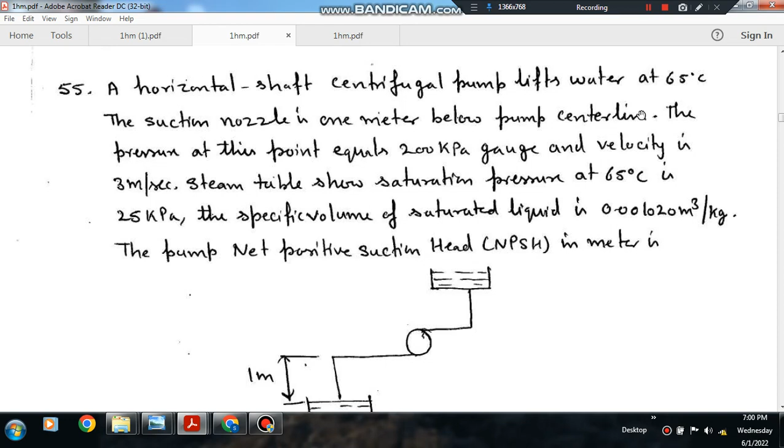Question number 55: a horizontal shaft centrifugal pump lifts water at 65 degrees Celsius. The suction nozzle is 1 meter below. The pressure at this point equals 200 kPa gauge and velocity is 3 meter per second. The steam table shows saturation pressure at 65 degrees is 25 kPa. The specific volume of saturated liquid is 0.001020 meter cube per kilogram. The pump's net positive suction head, NPSH, in meters: option A 24, option B 26, option C 28, option D 30.

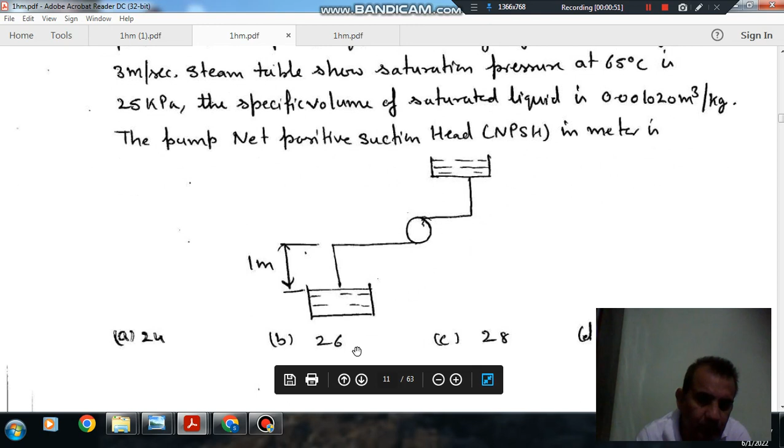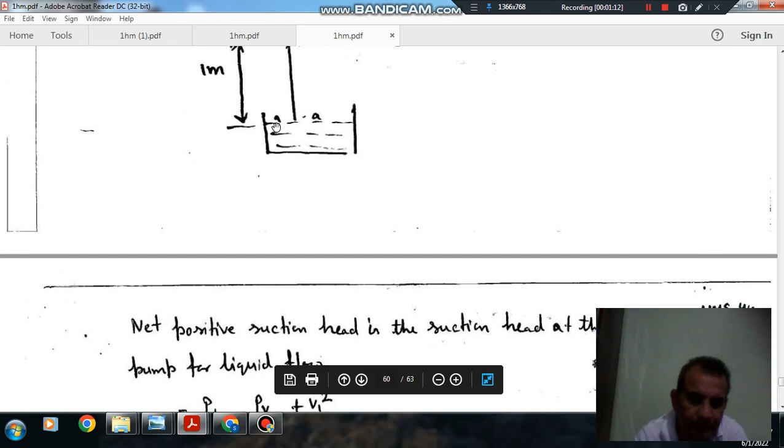So this is your schematic figure. This is 1 meter, and this is your pump, with point 1 just at the entry of the pump, and A is your atmospheric pressure or water level. So P1 is the pressure at A. Sorry, PA is the pressure at A, and P1 is the pressure at 1.

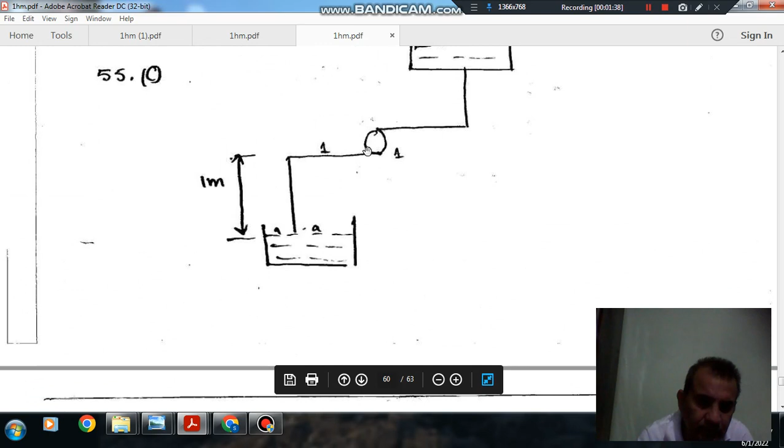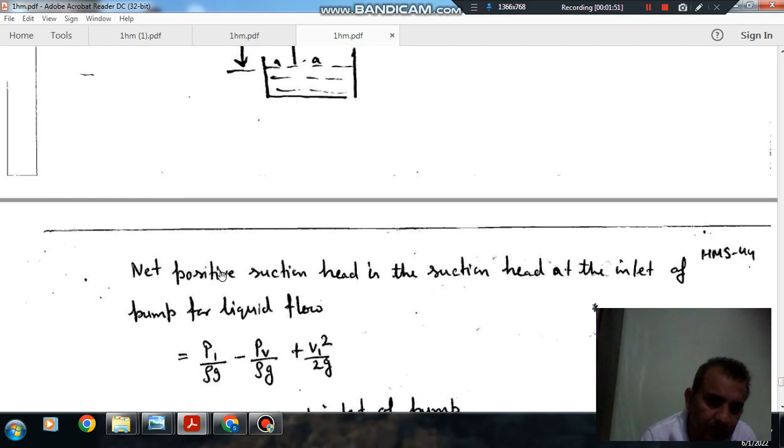So pressure at the inlet of the pump is P1. If a vapor pressure head is subtracted from this head, and velocity head is added to it, then it gives the net positive suction head. That is, the head above the vapor pressure head is called net positive suction head. So NPSH is the suction head at the inlet of the pump for the fluid, meaning total pressure head above the vapor pressure head.

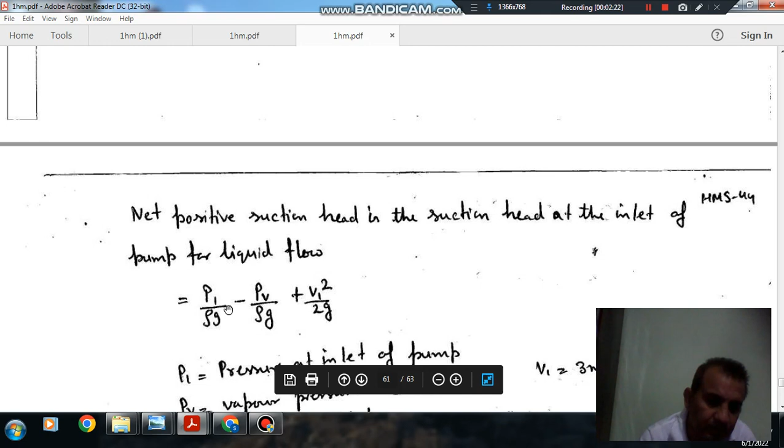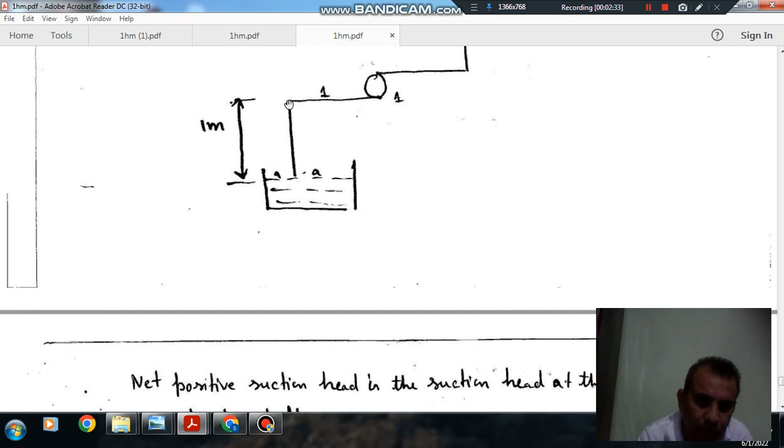So total pressure head is P1 by rho g plus V1 square by 2g at the inlet of the pump. If we subtract the vapor pressure head from this, we get the amount by which the pressure head is more than the vapor pressure head - that is the net positive suction head. P1, the pressure at the inlet of the pump, can be found using the Bernoulli equation between point 1 and point A.

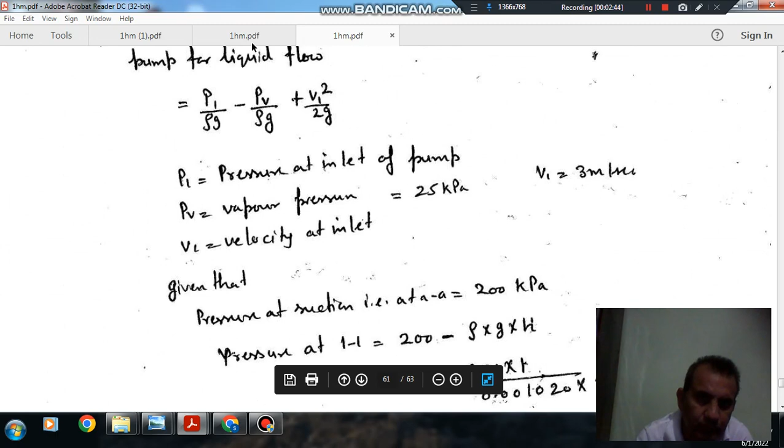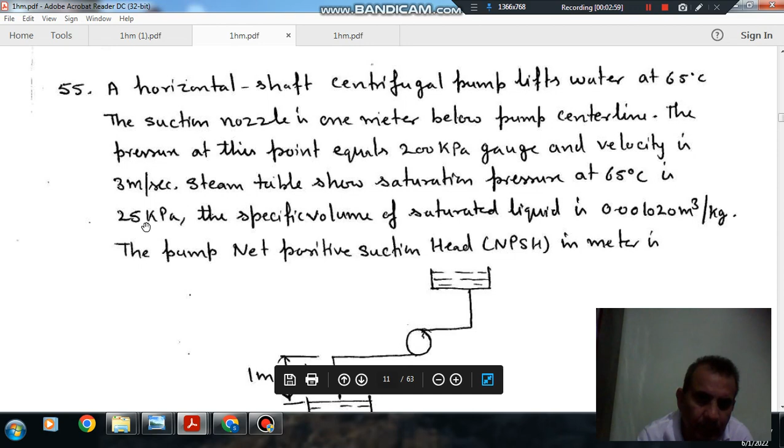So pressure at A is 200 kPa, which is given. The pressure at this point is 200 kPa gauge, and velocity is 3 meter per second. So head at this point - since the pump has to pump from this point, the pressure will be less here. So pressure at point 1 will be 200 minus rho g h.

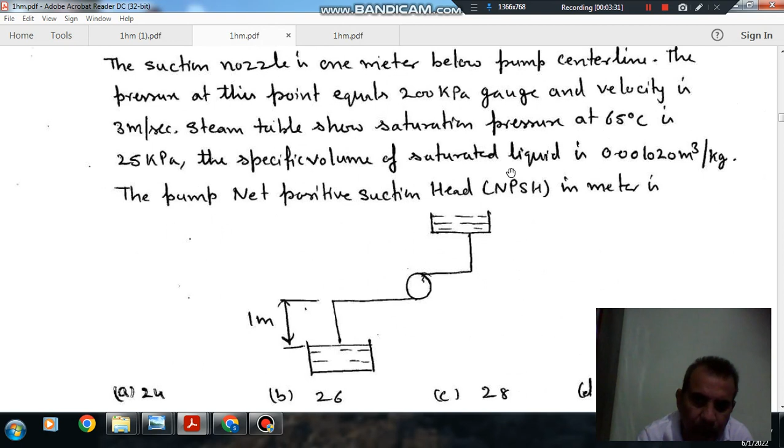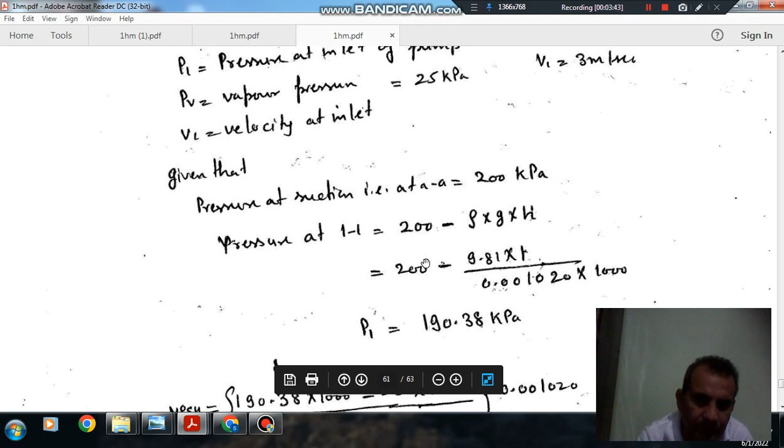And rho is 1 by 0.001020, the specific volume of the liquid given, multiplied by 9.81, multiplied by h, divided by 1000. So that gives 190.38 kPa. So pressure P1 is 190.38 kPa.

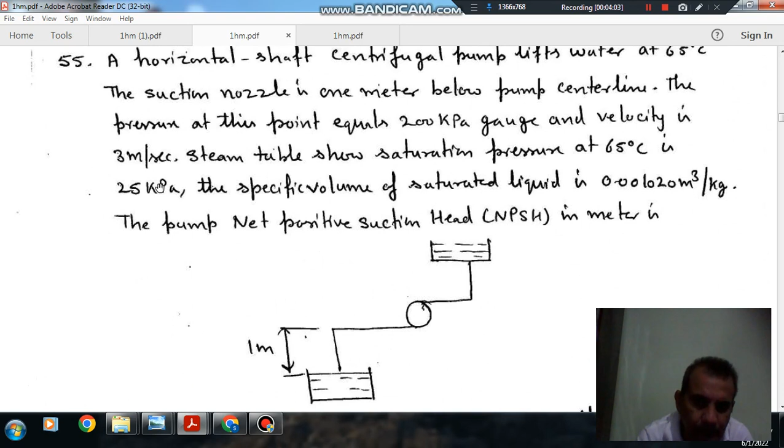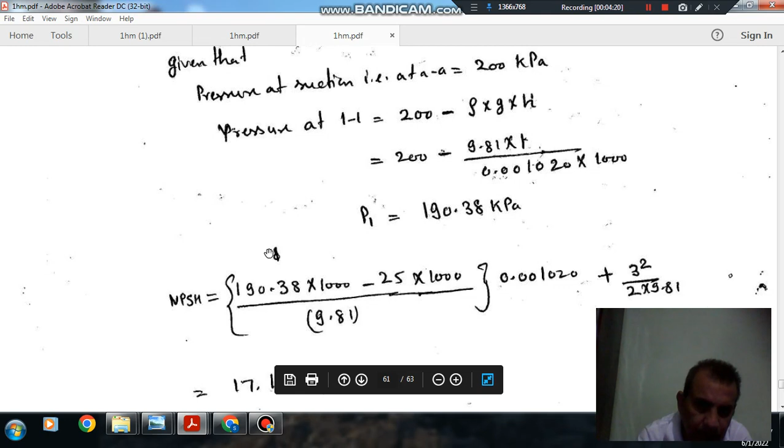So now we can put this into the formula to find the suction head. P1 is 190.38, and vapor pressure is given as 25 kPa. So dividing it, or multiplying by 1 by rho, and 9.81 - this is the pressure at 1, this is the vapor pressure, and this is your velocity term, 3 square by 2 into 9.81.

So this comes out as NPSH, net positive suction head: 17.653 meter gauge. So this is your gauge pressure value.

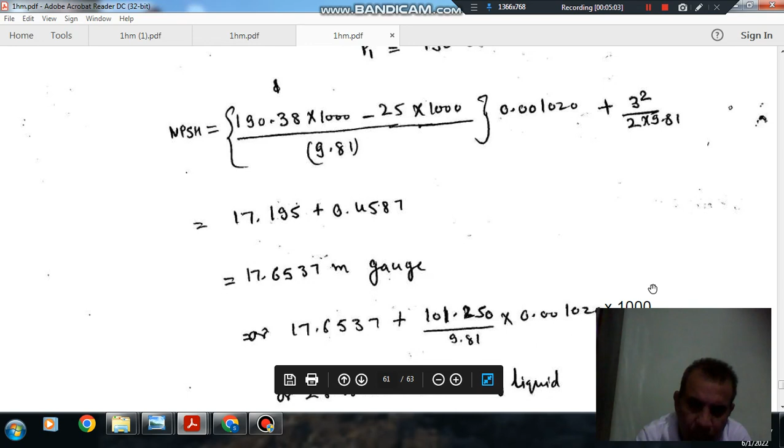If we add atmospheric pressure to it in terms of liquid head, atmospheric pressure is 101.250 thousand Pascal, and this multiplied by the specific volume of liquid times 9.81 gives the atmospheric pressure in terms of head of liquid. So it comes to 28.18 meter absolute head in terms of this liquid.

And in terms of water, we can divide it by this quantity, giving 27.62 meter of water. So the answer is option C, 28 meter.

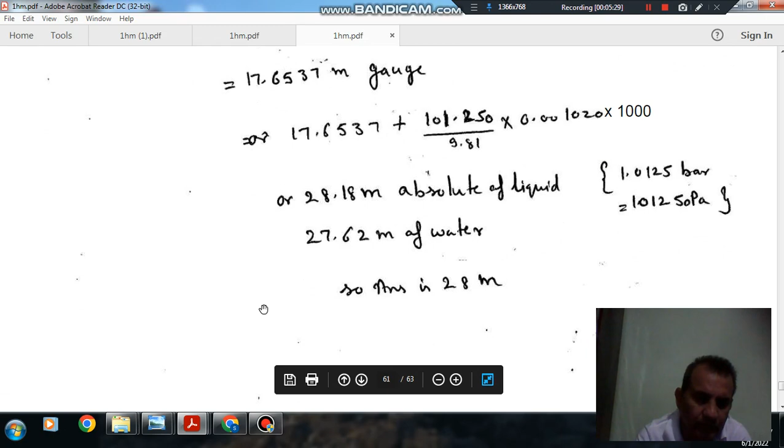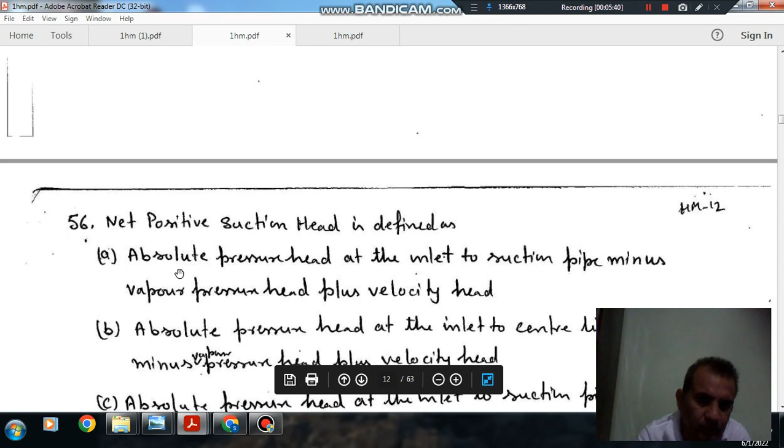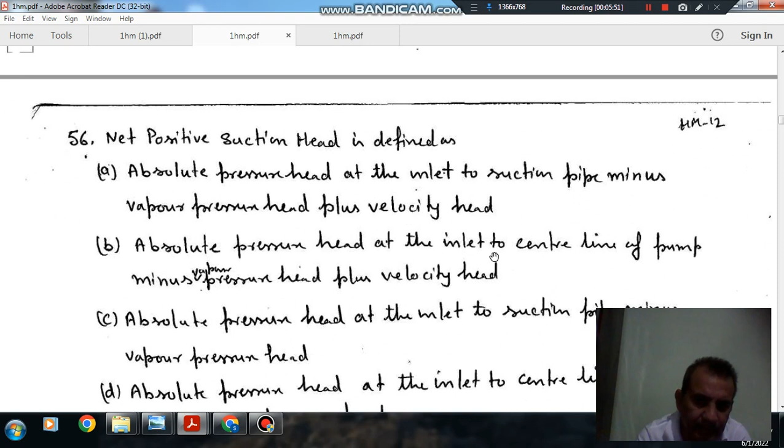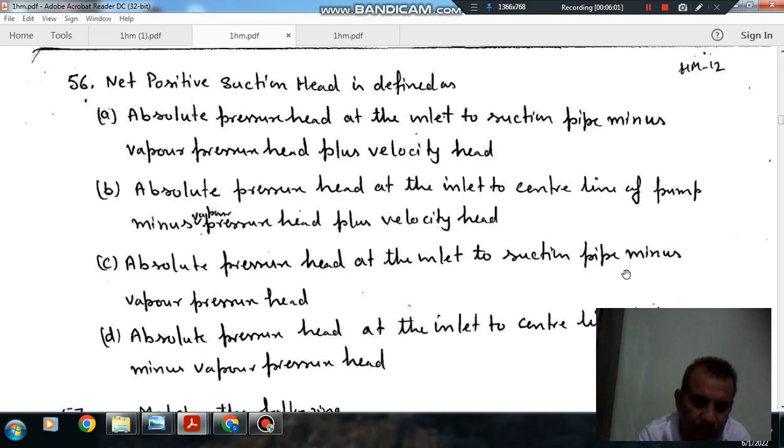Next, question number 56: The net positive suction head is defined as - option A: the absolute pressure head at the inlet to suction pipe minus vapor pressure head plus velocity head. Option B: absolute pressure head at the inlet to the centre line of the pump minus vapor pressure head plus velocity head. Option C: absolute pressure head at the inlet to the suction pipe minus vapor pressure head. Option D: absolute pressure head at the inlet to the centre line of the pump minus vapor pressure.

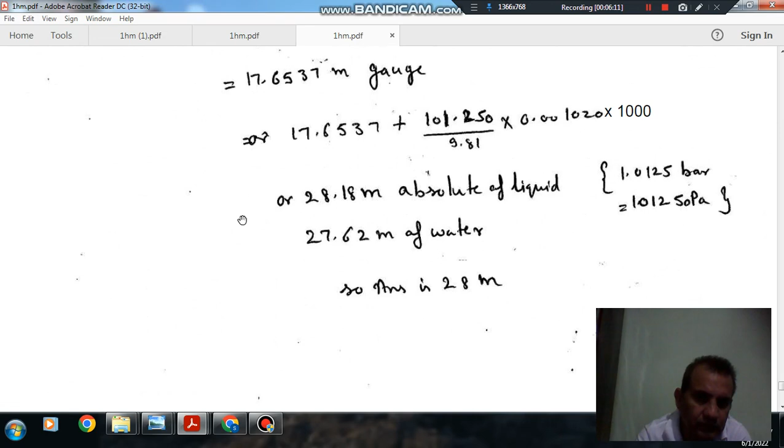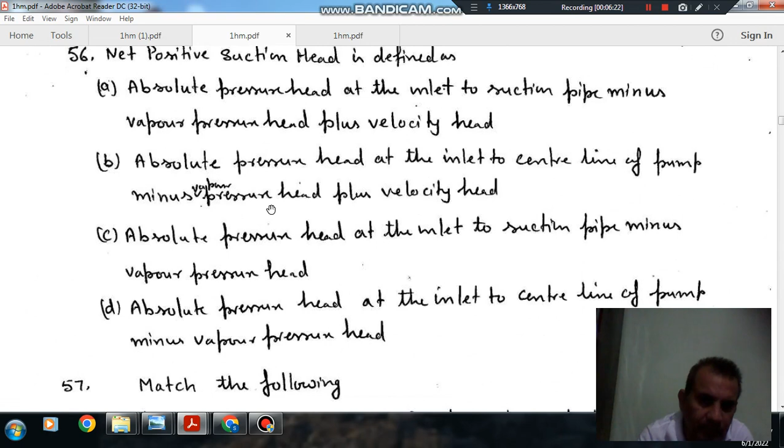So the answer to question 56: because we have to determine it from the central line, it is the absolute pressure head at the inlet to the centre line of the pump minus vapor pressure head plus velocity head. So the answer is option B.